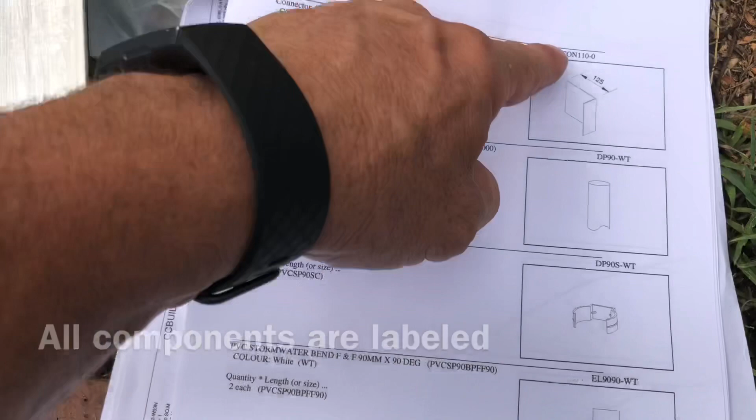When you go across to your paperwork, which is your list of items in the kit - your material list with diagrams - you'll be able to reference those actual screws themselves. They will be in this list with that code.

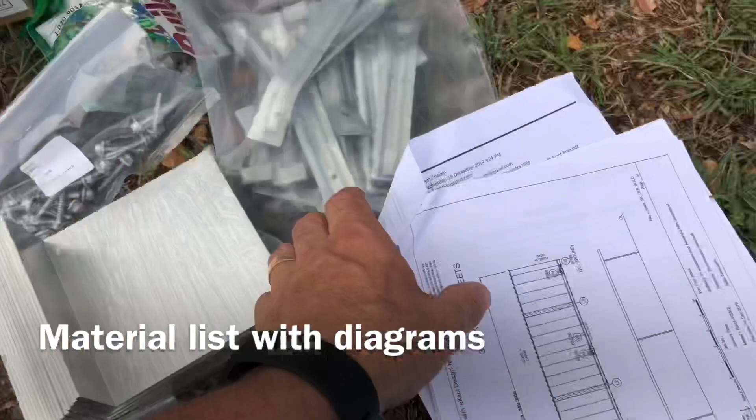If I could get my thumbs to work, we'd go poring all through that paperwork right now. Everything in the kit has a label on it, so you know exactly what it relates to and what it is. When you reference it to your documents, it has your materials list with diagrams on there.

Everything in your kit has a label on it, and everything has a place. L-shaped brackets for standard fascia attachment - these are the brackets that go behind the fascia of the house.

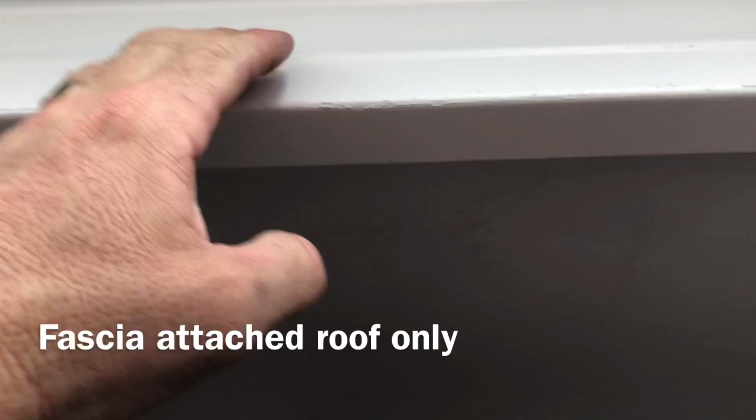With a house like this one, which is a tiled roof, you'll be kicking back a couple of tiles. Those brackets go behind the fascia, sit up against the fascia, and then your receiver channel that goes on the fascia will bolt through to that bracket with those beautiful bolts we just had out a second ago.

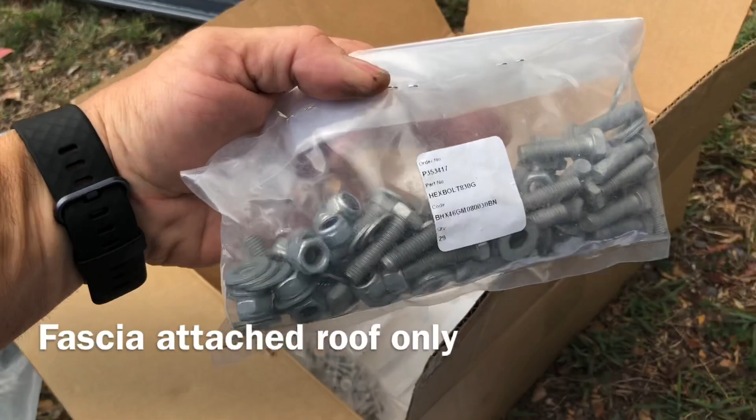With your receiver channels, you get a roll of foam like this that sits inside the receiver channel. This isn't sticky foam - you just sit it in the channel and push your roof sheets up into that. I'll try not to get my head knocked off by Steve here, who is kicking off the build on this job today.

Once your roof sheets are up, you get this second packet of foam inserts that sit in the actual sheet itself, in the pan of the sheet. That stops water from coming back inside.

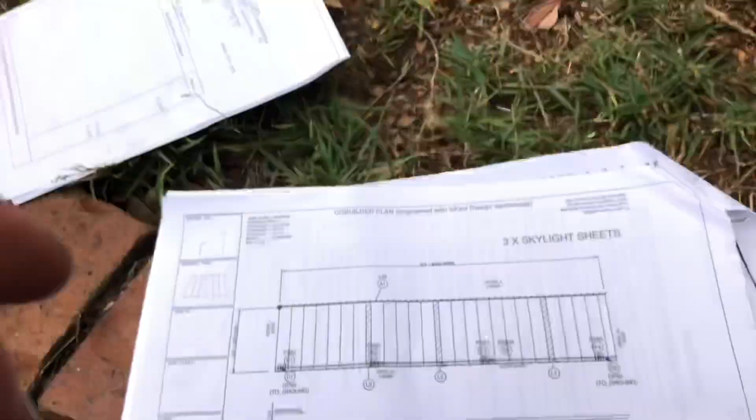Everything in your kit has a label and a description. That's the hardware. When you reference your paperwork, you're going to get a plan like this, and this is your roof plan. In this one, we can see that the roof is 16050 long - these are overall dimensions - and it has a total width of 3.3 meters, including the gutter.

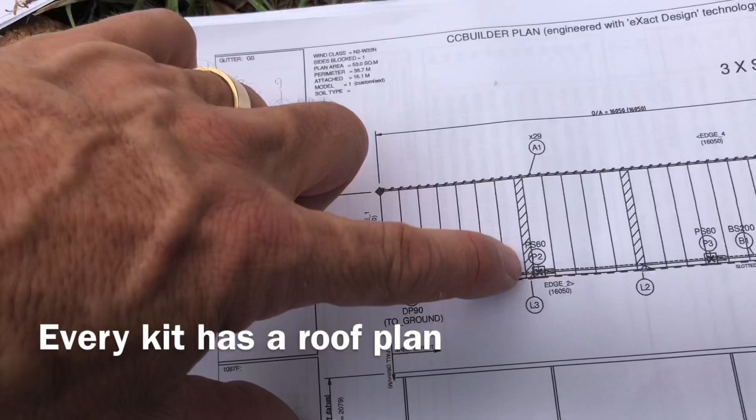You've got 1, 2, 3, 4 posts, skylight sheets. Now every line on this page is a roof sheet, the width of a roof sheet. Where you see a hashed line like this, that's an attachment back at the house. Where you see a dotted line like this one, that's your beam.

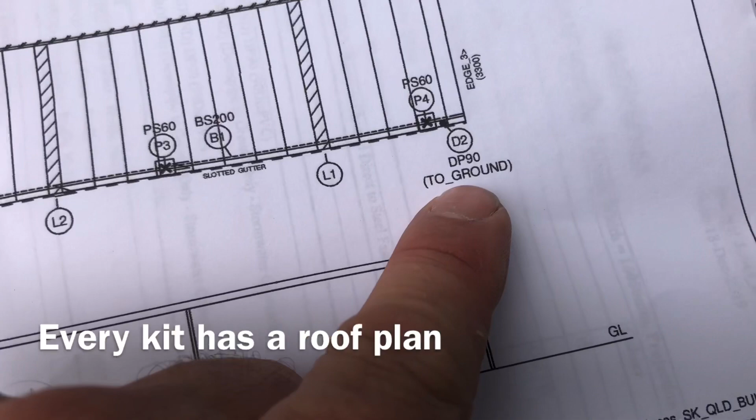In this roof we have a DP90, which is a downpipe 90mm to ground level. And PS60 relates to the size of the post - it's a post steel 60. P1, P2, P3, and P4.

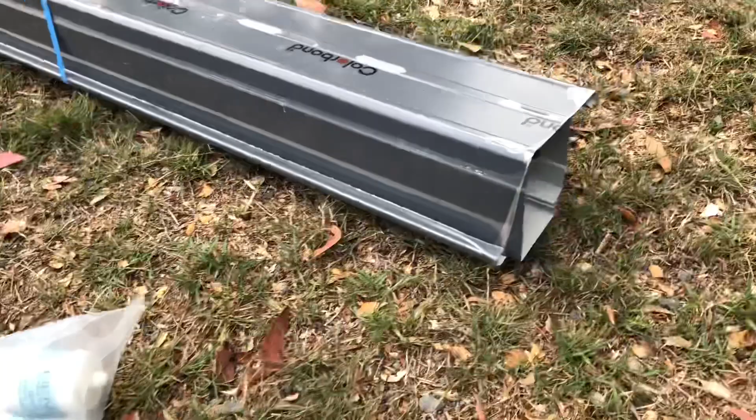When your materials arrive, your gutter - this is the guttering at the front of the roof - will come wrapped and strapped like this, in the lengths required to make it work accurately. You'll also notice that everything comes with a plastic coating on it.

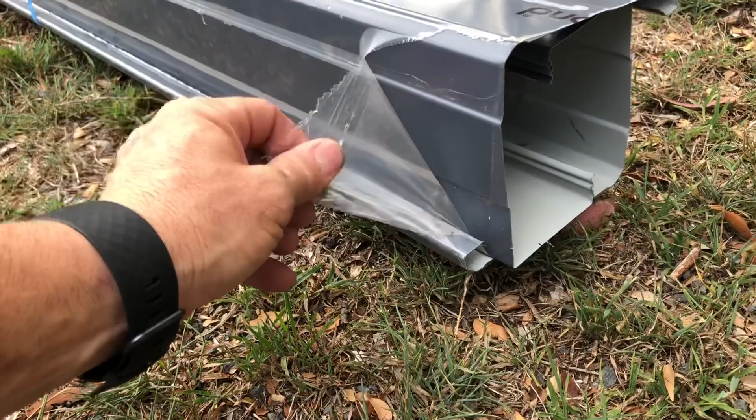And of course, being genuine Colorbond, you get a 20-year material warranty on that. So when you take the plastic off, you can see that beautiful Colorbond steel underneath it.

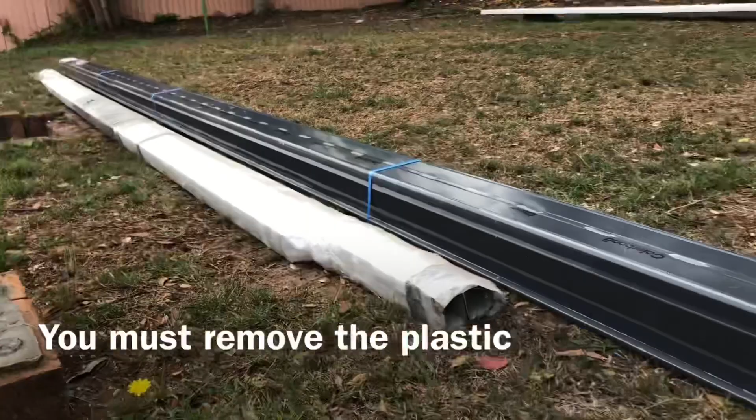Other componentry like your receiver channels and your beams will come fully wrapped in plastic like that, completely wrapped up for maximum protection. Now, a bit of a trick for everyone.

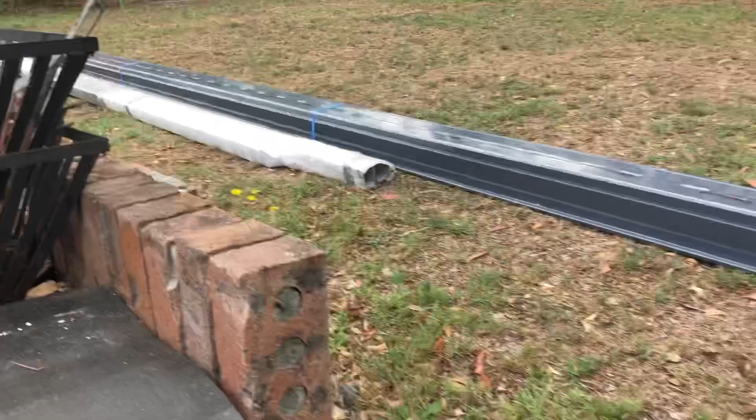The reality is you can get little scratches on Colorbond and it's not the end of the world. These can be fixed up with a little bit of touch-up paint, or you don't have to really worry about them. Just because the paint has a minor scratch in it doesn't mean the product is compromised for warranty. Minor scratching, no problem.

So, some basic breakdown of what's inside your kit. When you get it, go through the materials, work on the material list, identify each item in the kit with the material diagram list, and that's the first step to getting ahead on your project.

If anything's missing, anything's broken, or you're not sure about anything, just call us and we'll work it out with you, making sure that you're on track so that you can get your smart kit built as quickly as possible, saving yourself thousands and thousands of dollars and being another happy homeowner, taking pride and joy in your outdoor area. Have a great day.